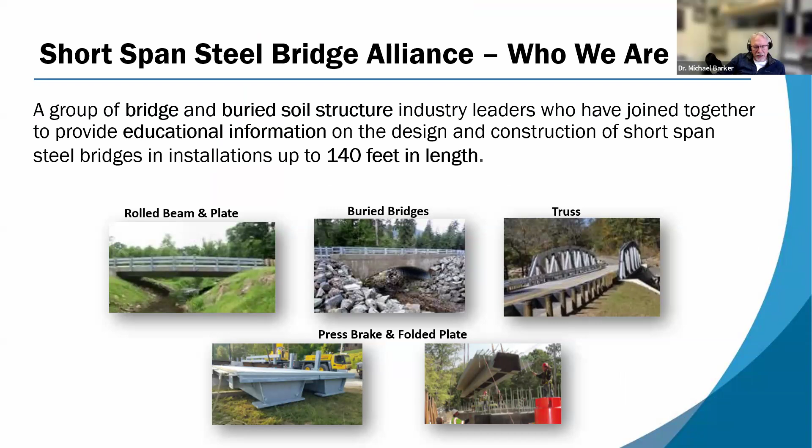We are a group of bridge and buried soil structure industry leaders who have joined together to provide educational information on the design and construction of short span steel bridges, and certainly this is one of them. We look at rolled beam and plate bridges, buried bridges or arches, truss bridges, press brake bridges, and folded plate bridges. Our members are pretty much anybody who has a stake in the design, production, and construction of short span steel bridges, ranging from academics all the way down to fasteners and painters.

What we do is education, that's what we do a lot of. This is an example of that, but we also have lots of online certificate programs and other types of webinars that you are certainly encouraged to join. You can find all that information at shortspansteelbridges.org.

We also have all sorts of technical resources. We have case studies, we have some design tools that could really help you consider short span steel bridges, whether they're rolled beam or plate girder bridges, with E-span 140 and E-beam. You can find information on these at our website, and I really encourage you to visit that website.

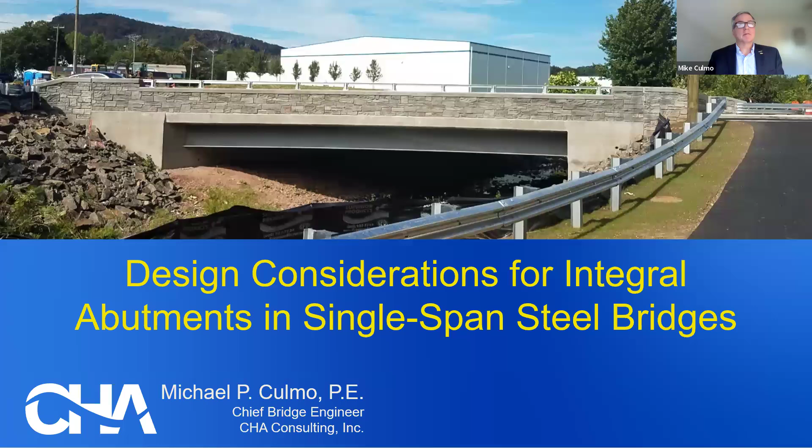It's a pleasure to be here today to talk about integral abutment bridges. The AASHTO Committee on Bridges and Structures has a major push right now for workforce development, so this is a great opportunity for us to share information among our colleagues in the bridge industry on topics of interest. And this is definitely a topic of interest. We got quite a few people signed up for this, which is awesome.

Again, today we're here to talk about design considerations for integral abutments in single-span steel bridges. My name is Michael Culmo. I'm the Chief Bridge Engineer with CHA Consulting, an East Coast consulting firm. I've been designing bridges now for 42 years, and so have a lot of experience designing integral abutment bridges. In our neck of the woods, we do an awful lot of integral bridges, and it's my pleasure to talk about what I know about integral abutment bridges and what is going on in the country with regard to their design.

Let me get my PowerPoint going. So for the presentation today, the first thing we're going to talk about is the definition of an integral abutment - what does AASHTO say about that? We're going to talk about the benefits, and there are several significant benefits for integral abutments, where they're appropriate, where they're not appropriate, some of my thoughts on that, and then get into design considerations, specifically the AASHTO LRFD bridge design specifications and state DOT provisions, primarily focusing on Minnesota DOT. Then we'll show some common details, again focusing primarily on Minnesota DOT, and go through a couple example construction projects to show photos of how these things actually get built.

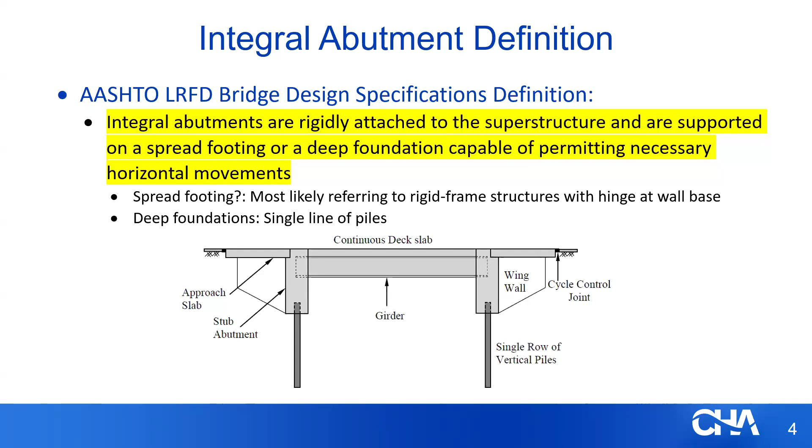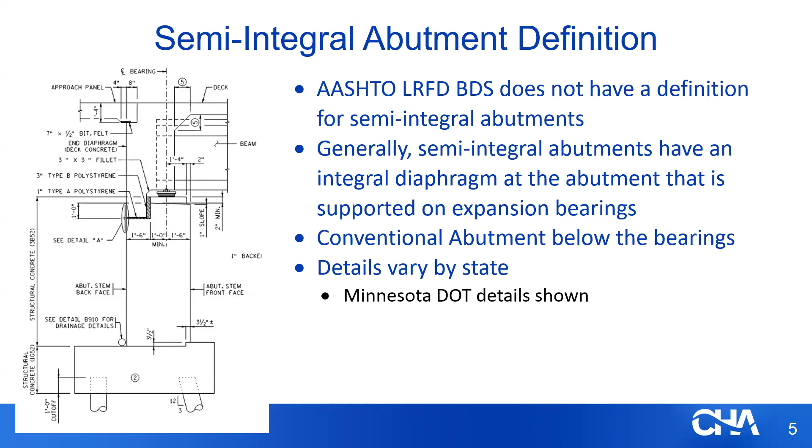Typically, semi-integral abutments have expansion bearings and fixed bearings underneath the beam to allow for thermal movement of the superstructure, but not in sync with the substructure below it. Typically, the substructure is more of a conventional abutment. We'll talk a little bit about when these are appropriate and when you would want to go to a semi-integral design in a minute.

So, European experience - about 8 years ago, I went to a conference in Italy. It was a bridge conference, and they had a session on integral abutment bridges. And I was like, oh, this is great, I'm going to go and learn about what the Europeans are doing for integral abutments.

Everyone thinks Europeans are way ahead of the U.S. and we're lagging behind. Well, the exact opposite is true. In my experience, the U.S. is very much ahead of the Europeans when it comes to integral abutments.

A lot of the engineers from Western European countries didn't like the U.S. details. They get nervous about having a single line of piles, worried the bridge will get out of position, that one side may push harder than the other, and the bridge won't be vertical. They really weren't in favor of the US-style integral abutments with a single line of piles at the abutments.

Interestingly, though, at that point, England was building US-style integral abutments. One of the presenters was from England, and he showed photos of designs in England that were very much similar to the US, and he credited the US, saying they had taken the ideas from the US market and were building US-style integral abutments in England at that time.

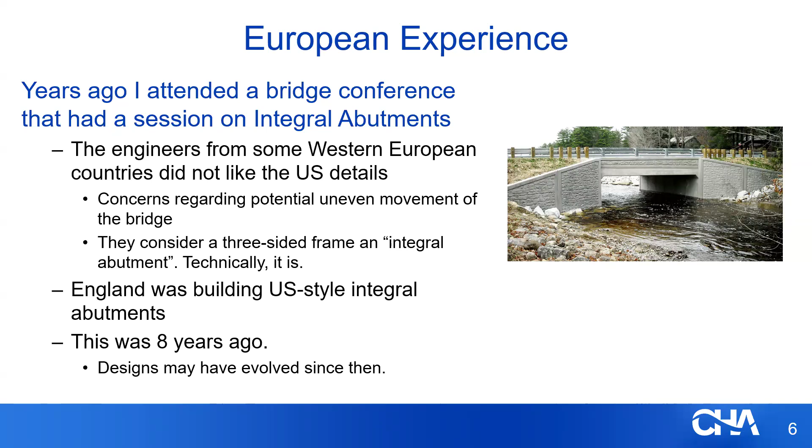Keep in mind, this was about 8 years ago. Things may have changed and evolved since then, but at that snapshot in time, at least at the conference I attended, integral abutments were not as popular in Europe as they are in the US.

Things get interesting when you get to skewed bridges. The question is, do you have the pile installed along the skew of the superstructure, or do you keep it square to the abutment? I've seen both. There's no standard approach - either way seems to work just fine. I suggest looking at whatever DOT you're working in, looking at their bridge manual for guidance, and really you can't go wrong whichever way you do it. I would typically recommend having the pile oriented on the skew with the superstructure, to correlate with the thermal expansion direction of the bridge.

Drill shafts have been used in integral abutments, typically small diameter drill shafts. The problem with large diameter drill shafts is they get very stiff and generate a lot of force when there's thermal expansion and contraction of the bridge. So we tend to see smaller drill shafts for integral abutments.

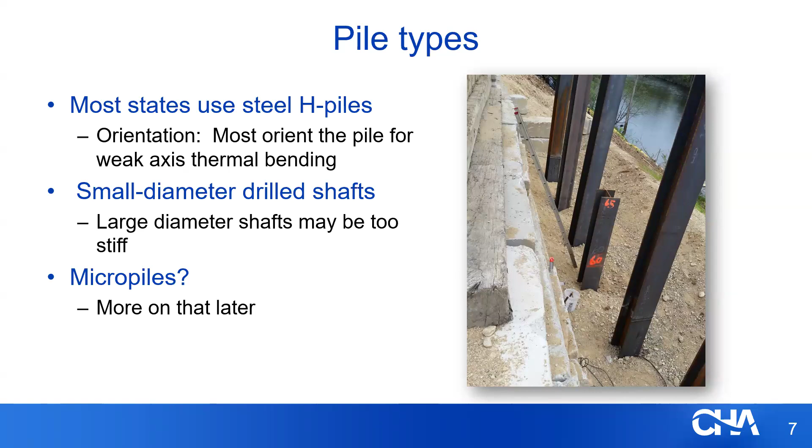Then a question comes up that I get asked quite often: micropiles. Can we use micropiles for integral abutments? I'll cover that later. There are some issues, or at least perceived issues, that are being studied, and there are several studies ongoing right now with the use of micropiles for integral abutments.

So what are the benefits? Why do we care about integral abutments? There are some significant benefits. Number one in my book is the elimination of deck expansion joints at the end of the bridge. It's definitely a significant durability improvement. I like the comment: the best joint is no joint in the bridge. As we all know, bridge joints can be the number one cause of bridge deterioration - leaking deck joints, I should say.

And I'm not taking a shot at the joint manufacturers - it's a very difficult thing to design a deck expansion joint that can last a long time and not leak. The abuse these joints take is brutal, and they tend to hold up for 10, maybe 15 years, and then start to leak. So if we can eliminate the deck joint, we're definitely going to improve the durability of the structure. We're all looking for improved durability - we're in search of that 75 to 150 year service life.

Elimination of bearings: integral abutments don't require expansion bearings. Sometimes we use temporary bearings just to get the bridge built, but once the integral abutment is made and the connection is made to the superstructure, there is no need for bearings. The thermal movement is accommodated by flexing of the piles.

So it's definitely an advantage not having bearings that you either have to install, or have to maintain over the life of the bridge. So very low maintenance costs on these structures.

Next item is lower cost. We've already eliminated bearings and we've eliminated a deck expansion joint. We're also going to use fewer piles. When compared to a typical pile-supported cantilever abutment, which might have 20, 30 piles in the abutment, we're looking at four to six piles in a typical integral abutment. So significantly fewer piles, which saves money. There's no footings, so we're not pouring a footing, and that's another step in the construction process, which is going to save quite a bit of time.

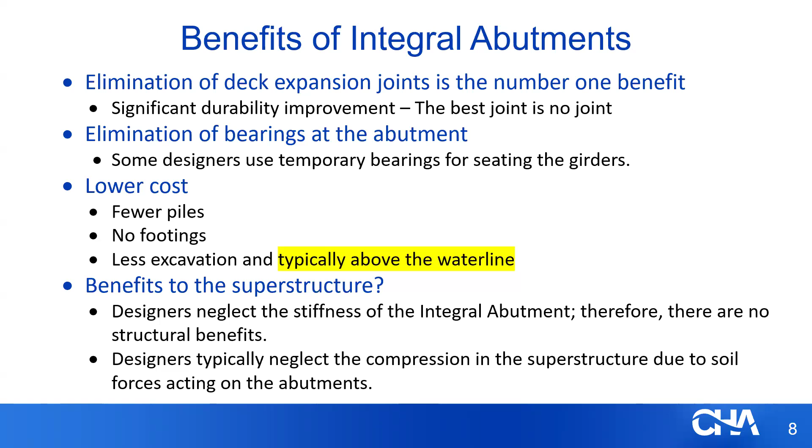So the benefits for the superstructure, are we gonna get some benefit there, some help there? The answer is not really. Designers typically neglect the stiffness of integral abutments because the stiffness of the piles is significantly lower than the stiffness of the superstructure - it's a decimal point in the equation. So typically we don't take advantage of the stiffness. I'll talk a little bit about the AASHTO provisions for certain types of bridges where you may want to consider the forces from the integral abutment, but typically we neglect the forces, especially the compression forces in the superstructure due to the soil forces acting on the abutments. The reason for that is the forces in the superstructure are peanuts compared to the bending moments we have from truck passage, for instance.

So where are they appropriate and where are they not appropriate? Single span bridges, definitely - you should be looking at integral abutments for virtually every single span bridge you're designing. You can definitely do it with continuous bridges too; it's been done in certain states. This presentation is really focusing on single span, but it can be done with multi-span bridges as well. A question that comes up a lot is what is the maximum length of bridge between integral abutments? The answer is it depends on where you're at - every state has different requirements. Some states have requirements around 150 feet max. You'll see later in this presentation, Minnesota DOT goes to 300 feet, and Tennessee DOT goes even longer. So I suggest you look at the bridge manuals in these states to get an idea of how long you can go with the design of an integral abutment bridge.

So where are they not appropriate? We have found with shallow bedrock, you have issues with the piles. If bedrock is only down, say, 20 feet below the road, you really cannot achieve pile fixity in such a short distance. Some states like Massachusetts will core the piles into bedrock - they call it a rock socket, and that's one approach. But typically with shallow bedrock, you want to shy away from integral abutments because there can be some issues. In that case, you might look at a semi-integral abutment - that might be an appropriate solution.

The next one is bridges with significant scour. It's a debatable topic - I've asked several DOTs this question: are you okay with the soil behind the abutment being scoured away in a major flood event? I've seen pictures of bridges after floods where the entire backfill was gone, where the river essentially scoured out behind the abutment and the bridge was fine, and they just backfilled and reopened the bridge. But you're losing the road. So it really is debatable whether a DOT is going to require scour design - again, I'd look into the bridge manuals in the states. I know Connecticut DOT has requirements for depth of stem for integral abutments. And for very long bridges, the soil pressures brought on by thermal expansion of the bridge can get significant - you're putting significant flexure in the piles. So a lot of states limit the length of bridge for these reasons.

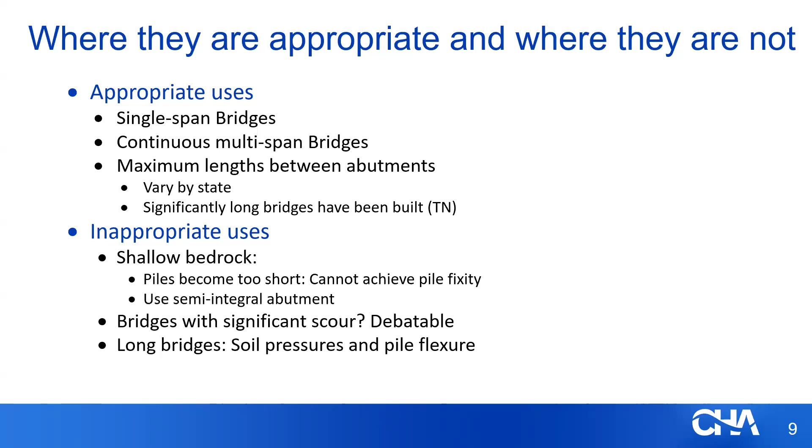So now we'll get into the design requirements for integral abutments. As far as I'm concerned, there is no national design process for integral abutments - we use engineering judgment in most cases. I'm going to go through the AASHTO bridge design specification criteria for integral abutments, and there's not much - there's a few things in there. But there are some states that have significant design requirements, such as Massachusetts and Minnesota. I'm sure there's more out there - Tennessee, I know, has a lot of requirements as well. Again, refer to the bridge design manuals in these states if you're designing an integral abutment there.

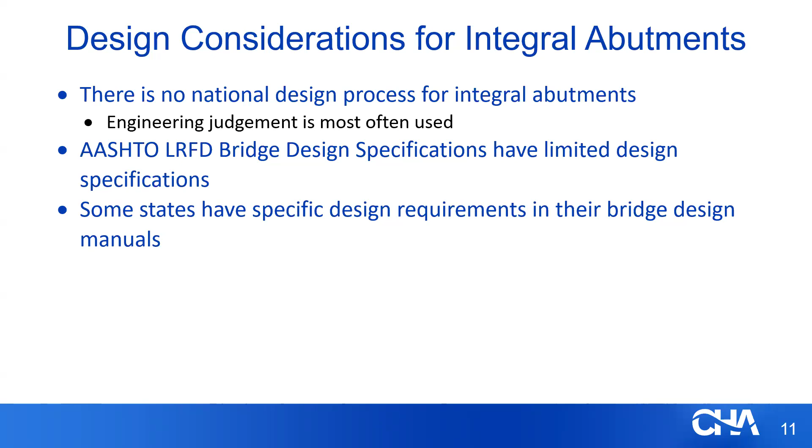So let's dive into the AASHTO LRFD. I did a search of integral abutment in the actual LRFD bridge design specification, and about 10 hits came up, and I'll go through each one of those now.

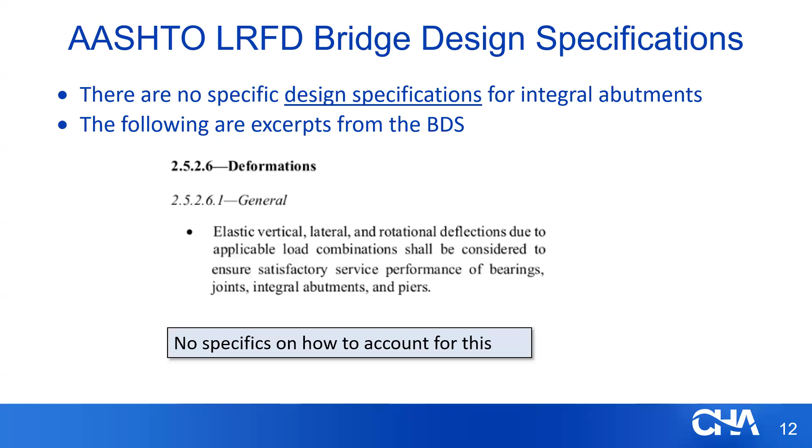Article 2.5.2.6 on deformations says that elastic, vertical, lateral, and rotational deflections due to applicable load combinations shall be considered to ensure satisfactory service performance of bearings, joints, integral abutments, and piers. It basically says we have to consider the movements of the bridge in the design of the structure.

Article 3.11.5 is on the loading section. The earth pressure loading has a comment there. It says that for integral abutment walls, significant arching of the backfill against the wall does not occur, probably due to the movement of the structure, and the resulting lateral load due to earth pressure acts at a height of h/3 above the base of the wall. You could read what goes on beyond that, but there's some guidance there on how to handle earth pressure on integral abutment bridges using this provision.

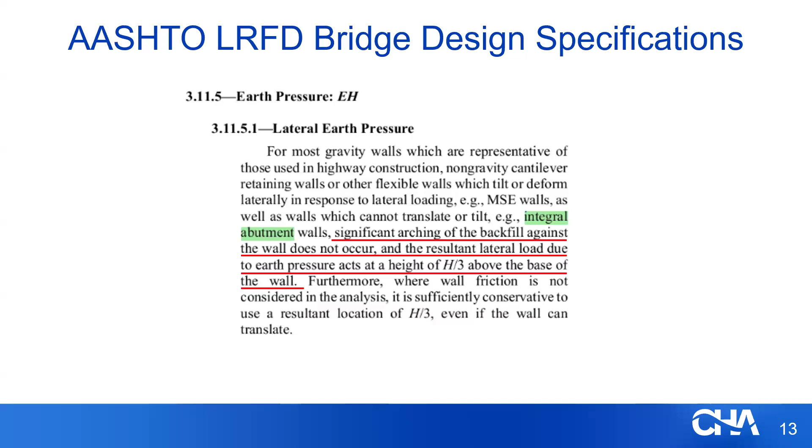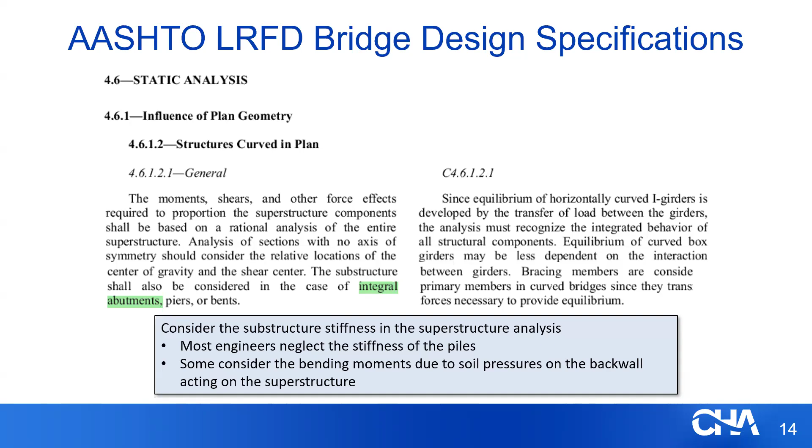As I said before, most engineers neglect the stiffness of the piles. Some consider the bending moments caused by the soil pressures acting on the back wall and the stem, causing negative bending forces in the superstructure when you have thermal expansion. I'll show that in a minute. And there are provisions in AASHTO that hint that maybe that's something you want to consider as well, which I'll get to in a minute.

For curved steel bridges, Article 4.6.3.3.3, this paragraph is in the commentary. The stiffness of supports, including lateral restraints, such as integral abutments or integral piers, should be recognized in the analysis. Keyword is should, doesn't say shall. Since bearing restraint is offset from the neutral axis of the girders, large lateral forces at the bearings often occur and may create significant bending in the girders, which may lead to lower girder moments than would be computed if restraints were not present. The engineer should ascertain that any such benefit recognized in the design will be present throughout the useful life of the bridge.

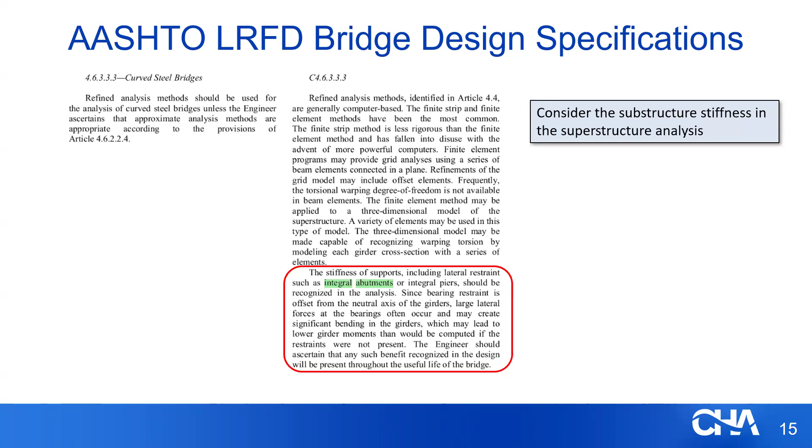This has to do with the soil forces pushing on the integral abutment, causing negative bending at the abutment. That negative bending can reduce your positive bending along the span, and that's what this commentary is hinting at. But the key word here is a lot of shoulds, not shalls. You may want to consider it, but be careful. Most engineers would not take those forces and say they're going to reduce live load bending moments because of soil pressure pushing on the back of the abutment. The reason is if the bridge contracts, you lose that soil pressure and it's not present all the time. So it's something you really can't count on.

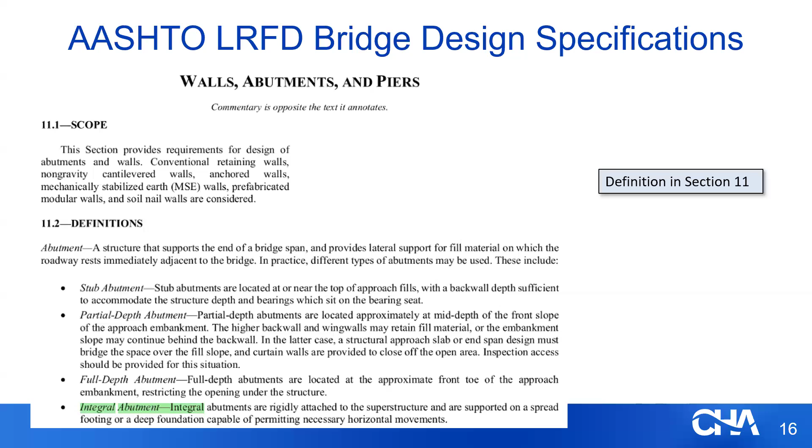Now we get to section 11 in the AASHTO LRFD, which covers abutments, walls, and piers. Here's where we find the definition of an integral abutment, which I shared earlier in one of the earlier slides.

We actually have an article on integral abutment bridges, Article 11.6.1.3. It just says that the abutment shall be designed to resist and/or absorb creep, shrinkage, and thermal deformations of the superstructure. So the thermal is probably the more important one of all three.

Then I circled this one area. To avoid water intrusion behind the abutment, the approach slab should be connected directly to the abutment, not to the wing walls, and appropriate provision should be made to provide drainage for any entrapped water. That's a good idea for any abutment, but specifically for integral abutments, AASHTO tells us to use approach slabs and put some drainage to drain the soil behind the abutment. One thing it doesn't mention about the approach slabs is that it also reduces the surcharge loading on the abutment stem by pushing that live load further away from the back of the abutment.

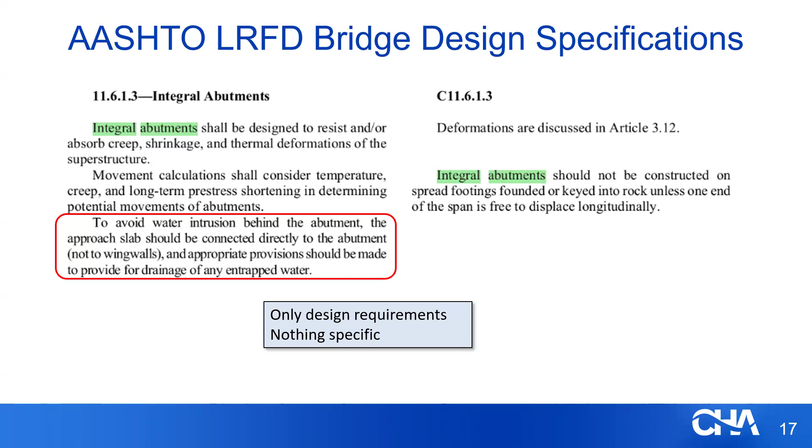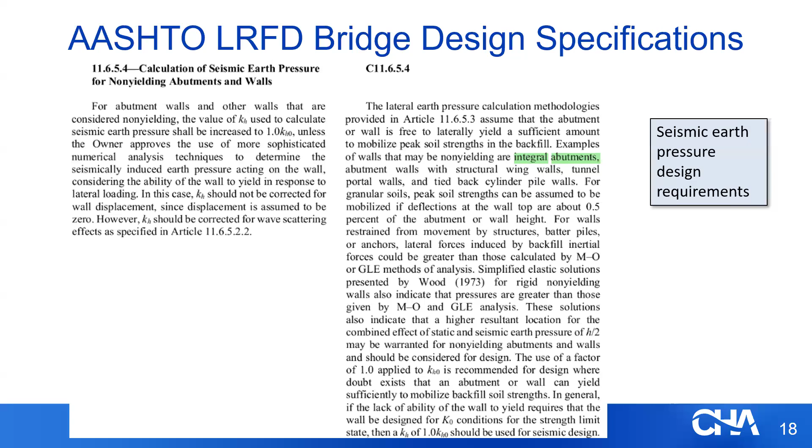So that's it for the AASHTO LRFD code. That's what we have, and you'll notice there's not a lot of equations, not a lot of specific requirements. And that's why I said before, engineering judgment primarily is what's used.

So now let's talk about how we typically design these bridges. As I mentioned before, we typically treat these bridges as simple spans, and we neglect the stiffness of the piles, and in most cases neglect the soil forces acting on the abutments when we design the beams. So when you're designing your girders and beams, you can use standard design software, treat it as a simple span, and design it. It's conservative because the soil forces tend to reduce your positive moments, but we don't count on those soil forces to reduce positive moments.

So the good news is if you're designing a simple span bridge, you want to use the Short Span Steel Bridge Alliance eSPAN140, you can go ahead and use it for an integral abutment bridge. Any software you use for design would work with integral abutments, which is a nice thing—it's not a special design requirement. And again, we neglect the stiffness of the piles because if you calculate the moment of inertia of that pile group compared to the moment of inertia of the superstructure, it's a decimal point on the end of the equation. So it's not even worth considering.

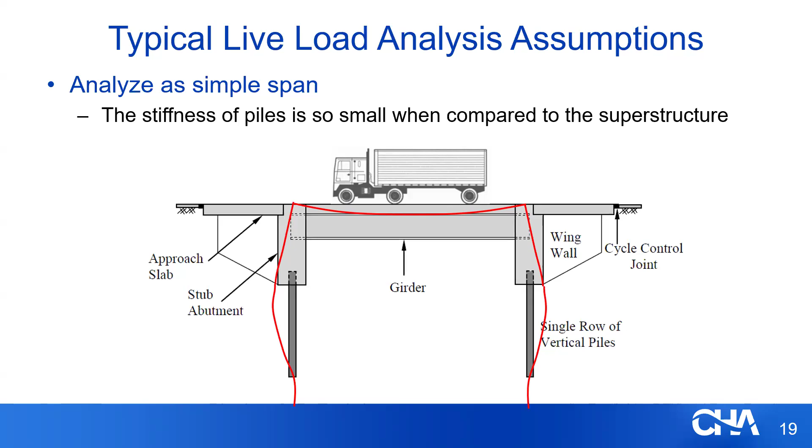We typically can check that negative bending. We would just design the bending moment at the abutment like you would for a continuous steel girder in negative bending at a pier. You would check to make sure there's adequate deck reinforcement to control cracking.

But here's the key thing, and this is a steel bridge webinar—this issue is more of an issue with pre-stressed concrete girders, because if you design any pre-stressed concrete girders, you know there's a lot of tension or very high stresses at the top of the beam at the abutments. Adding a big negative moment on the end of a beam can be problematic with pre-stressed concrete, so you have to be very careful with it. But the good news is steel structures can easily handle these negative moments—it's not a problem at all. It's something I suggest you check, similar to a negative moment region of a continuous girder.

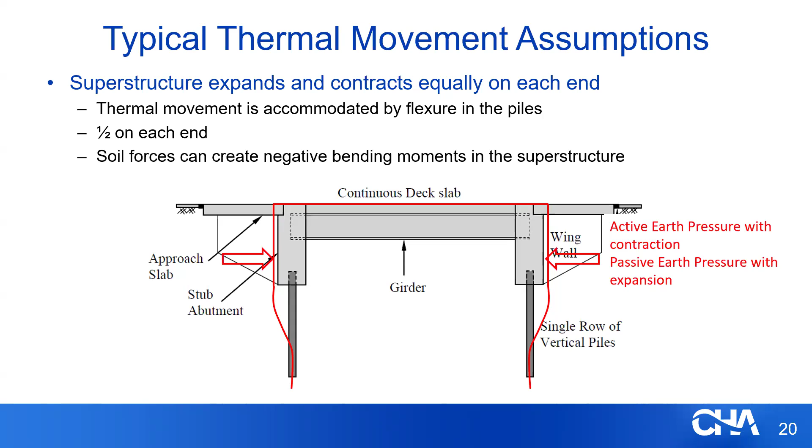Important thing to understand, and I've seen this mistake made a few times: consider the sequence of construction and include notes in the plans to specify it. When you go to pour the deck and the integral diaphragm, there are really three areas poured—the integral diaphragms at each end of the bridge and the deck over the top. You want to pour the deck first, so the red region would be poured first. This allows the girder to deflect under dead load, and your beam end rotations occur before you make the bridge integral.

Then you go and pour the abutment diaphragms after the deck. You can pour the second abutment diaphragm with the deck—so you start on the left side of the bridge, work your way across, and at the end, when you hit the end of the red section, you can pour the integral diaphragm as a continuous pour with the deck. But then you have to come back and pour the integral diaphragm at the other end of the bridge, because you want that rotation to take place before you make that connection.

You could consider retarding the concrete, although I would not recommend it. I've seen cases where with beam end rotations, you can get plastic cracking in that diaphragm before the concrete even sets. So I would suggest you include notes in the plans noting this type of sequence of deck pours.

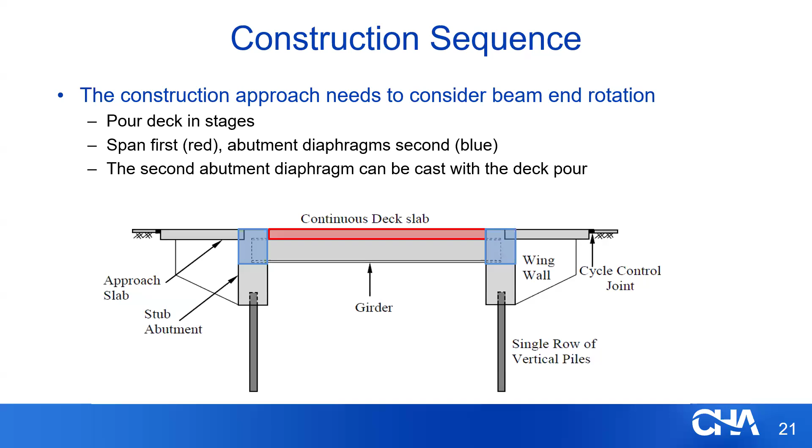So now we're going to get into state DOT provisions. What do the DOTs say? As I mentioned before, AASHTO doesn't have a lot of provisions, and some states have significant provisions, which is helpful. Unfortunately, every state seems to treat these a little bit differently. So us as bridge engineers who work in multiple states have to make sure we read the provisions.

So several states do have design provisions in the bridge manuals. Mass DOT I'm familiar with, they've had provisions for many years. They have standard rebar detailing, standard pile designs. Things are pretty well standardized in Massachusetts. They've been building integral abutment bridges from almost my entire career, like other states like Tennessee as well.

But today I want to focus on Minnesota DOT. It's a Minnesota webinar, and Minnesota DOT has a very good bridge manual with some very good practical approaches for designing integral abutment bridges in Minnesota.

So let's dive in. In the abutment type selection portion of the Minnesota Bridge Design Manual, it covers integral abutment bridges, and it's got some very practical approaches for selecting when to use them. For instance, bridge length can go up to 300 feet if you've got low skew between abutments. And the expansion length at the abutments is 150 feet, half on each end of the bridge.

If you start getting into skewed bridges between 20 and 45 degrees, the bridge length is limited to 100 feet because of the skew effects. And one of the issues with skew, there have been concerns - I call it the snowplow effect.

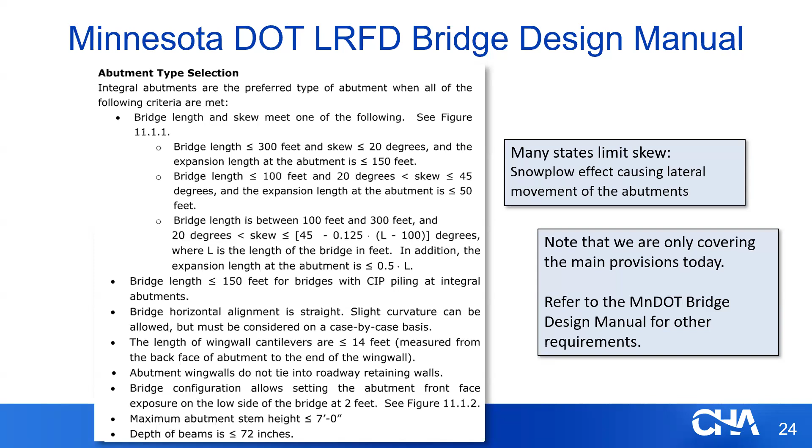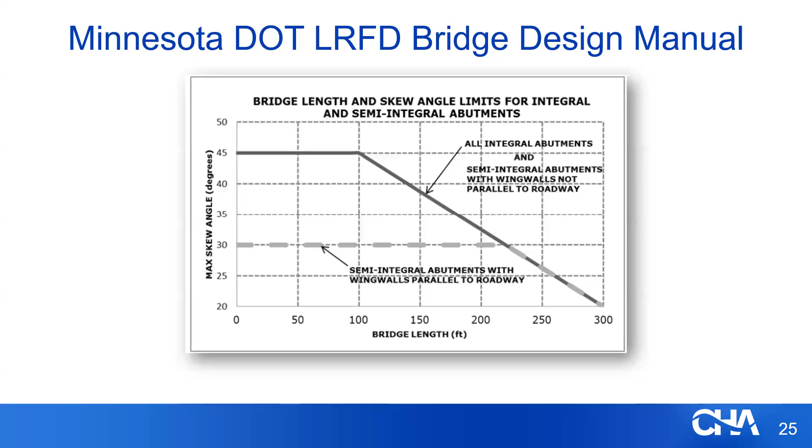This provision talks about semi-integral abutments in Minnesota, and where they are applicable. When the wing wall length requirements for structure depth, superstructure depth, and wing walls cannot be met, you should go to semi-integral. And then again, bridge length - there are requirements there as well.

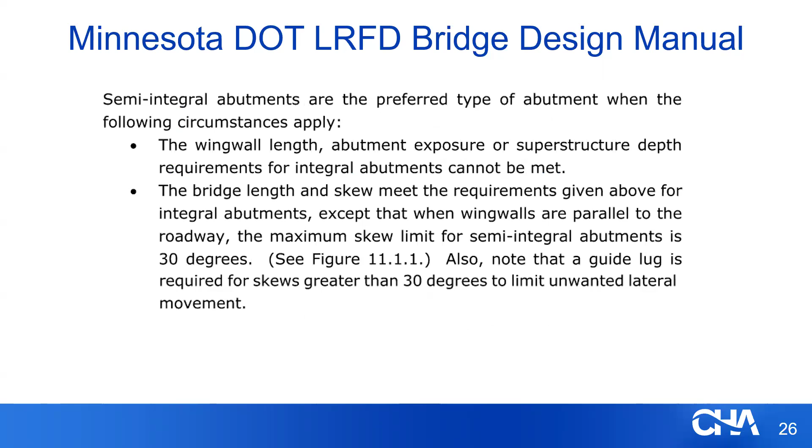Minnesota has details, similar to a lot of states, showing details as far as depth of embedment of the integral abutment into the abutment slopes. In this case, the recommended minimum thickness is 3 feet below the stem, and they're proposing to put riprap for scour protection in front of that.

And then there's notes about skewed bridges as well. They make a note that the typical Minnesota requirement of a 4-foot 6-inch embedment below grade is not required for integral abutments, like you would with a cantilever abutment. And then it specifically states that the H-piles should be oriented in the weak axis bending with regard to longitudinal bridge movements.

Minimum pile penetration into the stem varies state by state. 2 feet 6 inches is about average - I've seen up to 5 feet, and I've seen less than 2 feet. My experience, 2 feet is plenty of embedment. 2 feet 6 inches is very good, and you can develop the full bending moment capacity of the pile in that depth. Even 2 feet, you can do that in my experience.

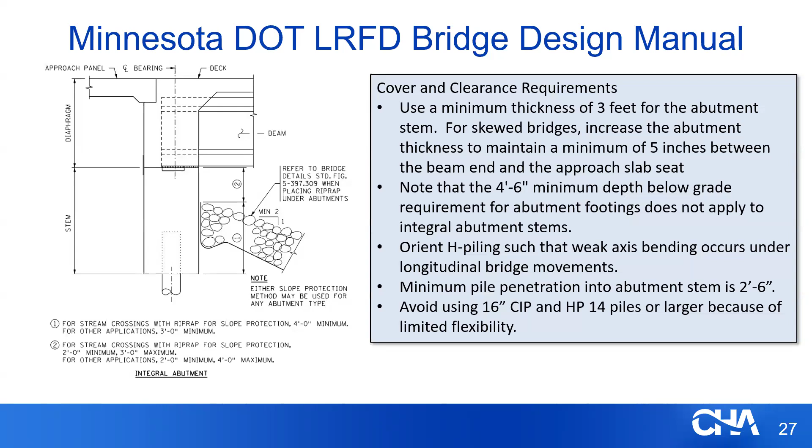Then there's a note about avoiding the use of 16-inch cast-in-place piles or 14-inch HP piles. Again, trying to keep it relatively flexible to accommodate the thermal expansion and contraction.

The Minnesota Bridge Manual has details for wing walls, saying the maximum length of the cantilever wing wall is 14 feet. I've seen cases where engineers want to put piles underneath the wing walls, but you should not do that, because that wing wall is rotating with the integral abutment under live load. You don't want any piles underneath the wing walls, since it's rotating with that abutment stem. It's a cantilever, like an elephant ear sticking out the back. Minnesota limits the length to 14 feet, which is about average. Most states vary between 10 and 15, maybe even 20 feet, but 14 is a pretty good average.

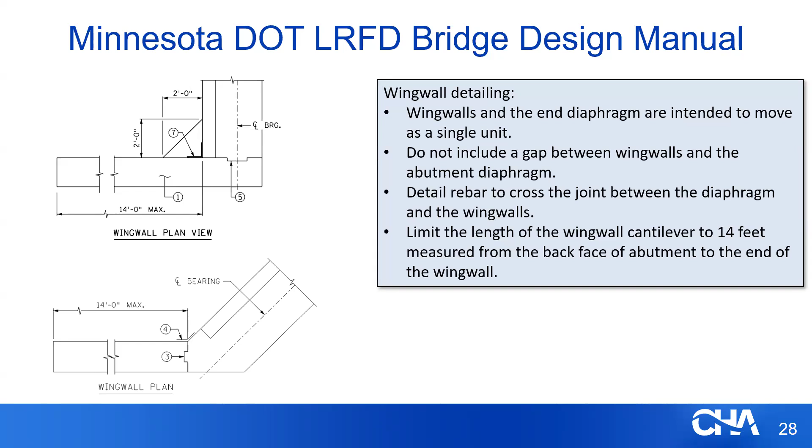Now we get into details. These are the typical details from Minnesota DOT. I like these details, they're similar to most states that do this, with some minor changes you'll see later.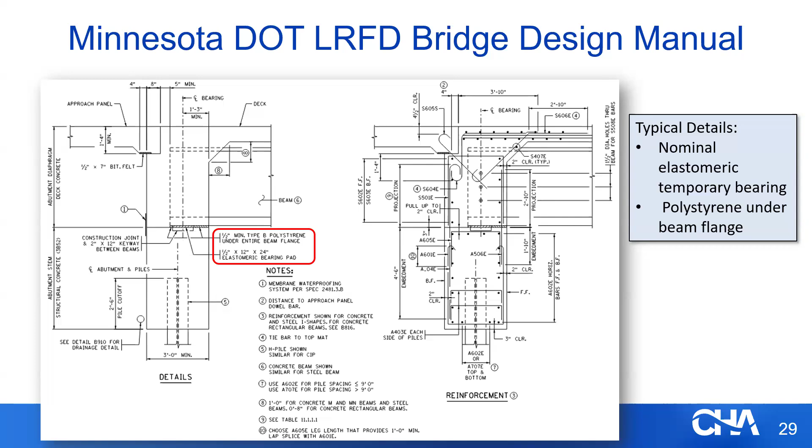Moving on, additional criteria in the Minnesota Bridge Manual. I like this criteria, it's an interesting one that's debatable in the industry, saying design the piling for axial loads only. We know there's going to be bending in the piles, especially with live load on the bridge and also thermal expansion and contraction. But this provision came out of, I believe, Tennessee, and it's a provision that I believe in.

You might say, but there is bending in the piles - I'll cover that in the next slide, my theory of why you can ignore bending in the piles and just design them for pure axial load. Also, this section of the bridge manual talks about live load distribution, where you essentially treat the abutment stem as a pile cap and distribute the live load along it using simple logic, nothing very complicated.

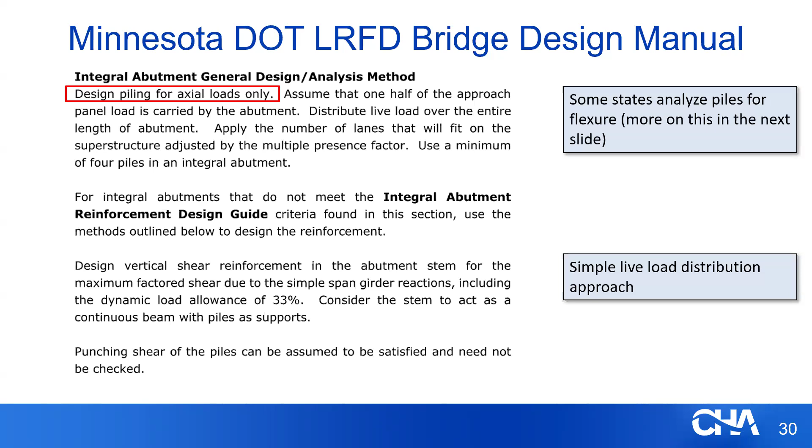So let's talk about this flexure issue. Minnesota only specifies axial load, so we ignore bending in the piles. States like Massachusetts do not - we design piles for flexure in Massachusetts. I believe in Tennessee they also ignore bending in the piles, but they limit the maximum length of integral abutment bridges, like Minnesota. They've done studies based on typical loads in piles and typical thermal bending moments, and determined that as long as you stay within the bridge manual limits, you can ignore bending.

So why ignore flexure? These are my thoughts - there's nothing in AASHTO, nothing published that I'm aware of explaining why we do this. But in my eyes, we can consider flexural stresses to be similar to residual stresses in steel. The reality is structural steel - I got this diagram off the internet - all rolled sections have significant residual stresses, 10 to 15 KSI is pretty standard, just due to the rolling process and cooling of the steel in the mill. So we ignore residual stresses in design.

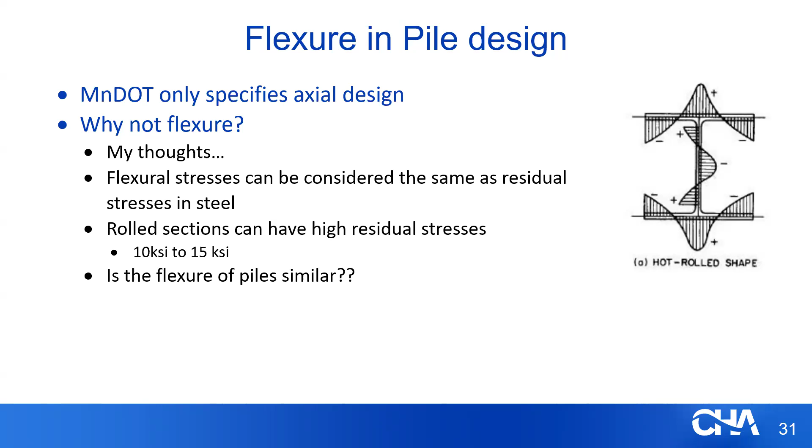We just go through and design it. So why do we ignore these high 10 to 15 KSI residual stresses? This might be the answer for why we can ignore bending stresses in piles of integral abutment bridges, because it's really similar to a residual stress. Let's take a look at that. When I was in grad school, my professor taught us about residual stresses in the design of columns, and why we ignore residual stresses in columns.

The idea is that as you apply compression, your compression in the column is additive to the residual compression stress in the beam, so that area of the beam will yield before the other areas. But as you continue to add load, eventually you start yielding the compression area, but you've got ample capacity on the tension side where you haven't come close to yield. The result is the ultimate compressive load works out to be A times Fy, and that's if you have a compact section.

So we literally ignore residual stresses, and that may explain why we as engineers might feel comfortable ignoring the bending stresses in integral abutment piles.

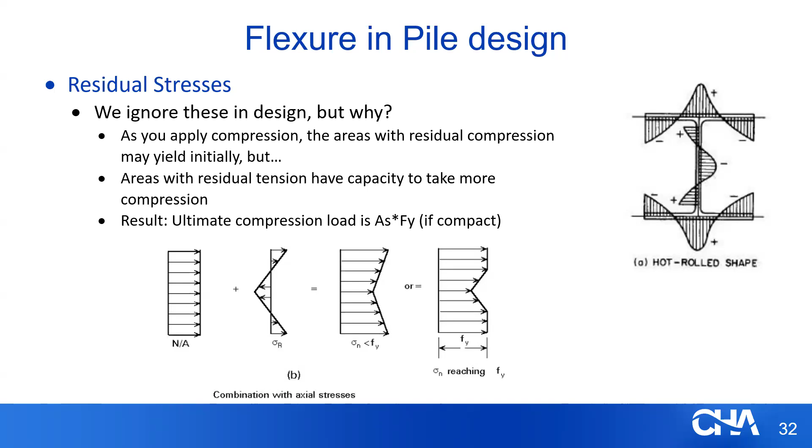Minnesota DOT has some geotechnical requirements, fairly straightforward. The key thing is they design for full passive earth pressure. Massachusetts DOT does a calculation based on the amount of thermal movement to see if you get to full passive or partial passive. So there are different provisions out there - again, refer to your bridge manual. But I reiterate, this may be an issue with prestressed concrete beams having a significant negative bending moment at the ends, but steel can definitely handle it, and it's really not a big issue.

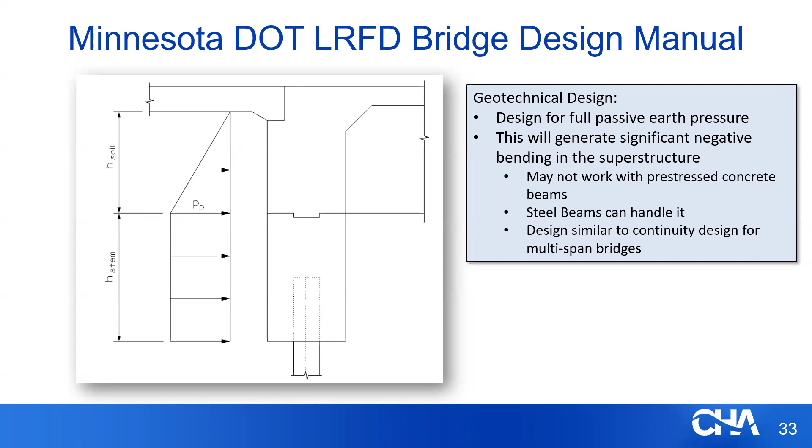As far as semi-integral abutments go, Minnesota DOT has some great details - I like these a lot. I've seen various details around the country. The key thing is the bearings are designed to accommodate thermal movement, but the longitudinal forces, such as braking forces, are resisted by the back wall. So it really helps out with dealing with those longitudinal forces.

And I added here, this detail works really well with accelerated bridge construction. I'm going to show you some details used in Utah, and we've used them in other states as well, where you could design a semi-integral bridge with ABC. So you get the benefits of integral bridges, and you also get the benefits of accelerated construction.

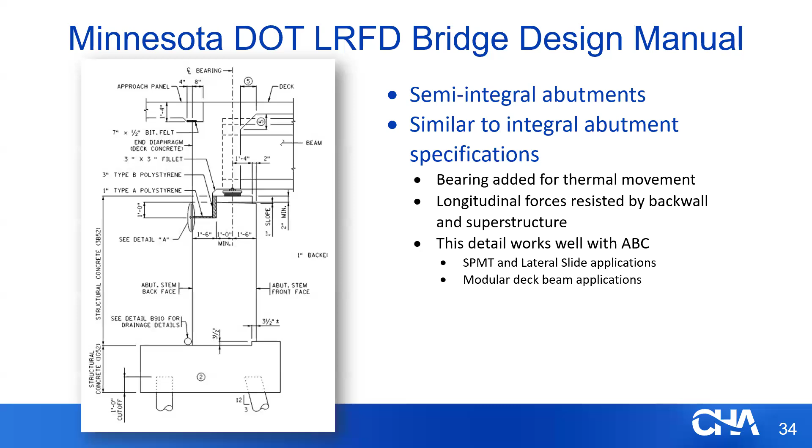Here's what that might look like. This is a bridge in Rhode Island that our firm designed a few years ago - a single span steel bridge, about 80 feet. The detail on the right is a SketchUp model of the semi-integral abutment diaphragm. You'll notice that tooth on the back, which looks a lot like the Minnesota tooth, and those other knobs sticking down are used for sliding the bridge. It's a great detail that works really well.

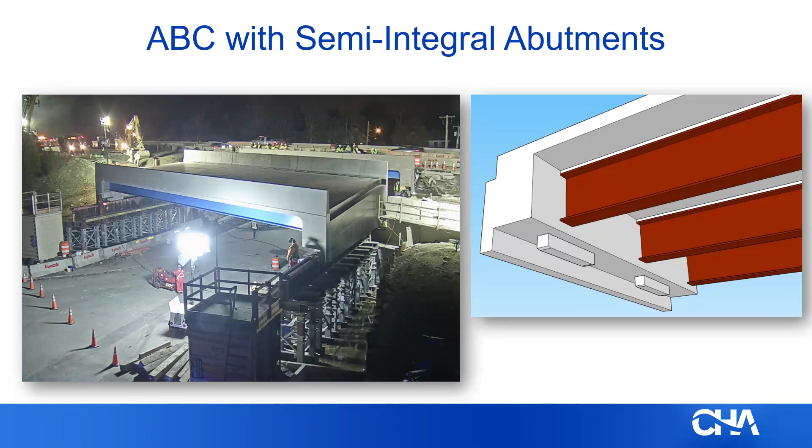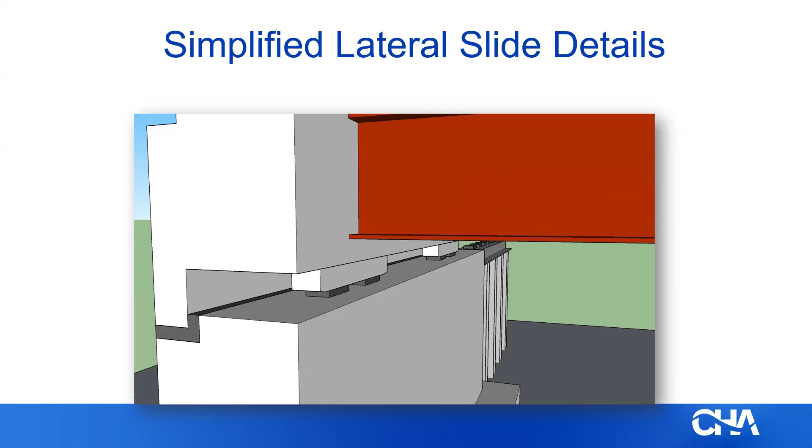Here's how it goes: you build the bridge on temporary supports nearby. Once the abutment is finished, you start sliding the bridge over on temporary slide bearings or a slide track. Once it's in place, you jack the bridge up, put the permanent bearings underneath those shoes, and then place closed cell elastomer to seal off that joint in the back to prevent groundwater from coming onto the bridge seat - very simple detail. This can be used for lateral slides, SPMT moves, and modular deck beams as well. All ABC methods that are very much applicable to steel bridges.

So now let's go through some sample projects - let's take a look at some bridges that have actually been built. I've got two I want to share, primarily because I have a bunch of photos. I have one bridge with just one photo, but then I have a really nice steel bridge with a bunch of photos during construction.

I mentioned before about micropiles, and there's been a lot of discussion on why can't we use micropiles for integral abutments. Massachusetts DOT is studying this right now. This is the Champeau Road Bridge in Sturbridge, Massachusetts - about a 65, 70-foot long bridge. Mass DOT had a desire to use micropiles, but we took a conservative approach.

So for the design of this particular bridge, we specified a minimum coupler depth - the coupler had to be a certain number of feet below grade, where the bending moments in the pile were not very significant. So it is a concern, but Massachusetts is looking at this.

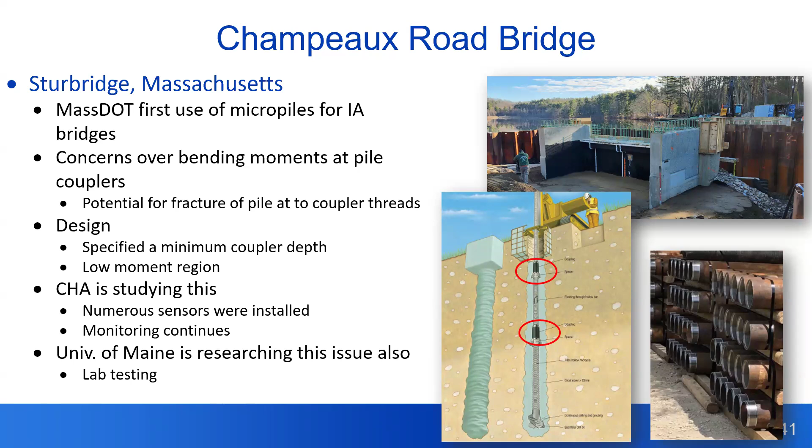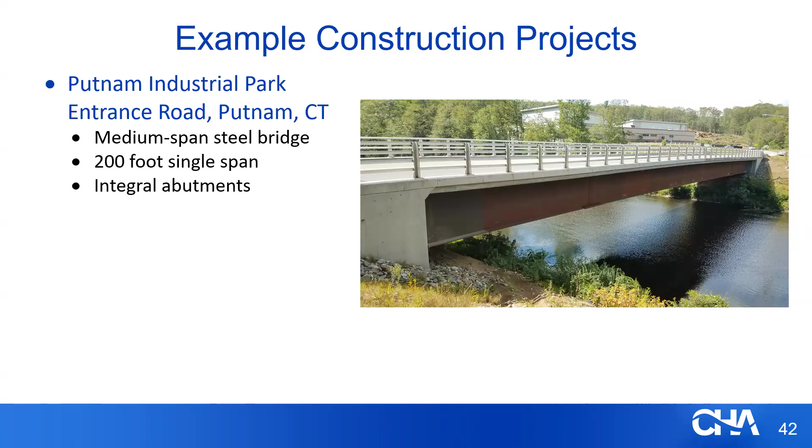Now we'll get to an example project showing the construction of an integral abutment bridge. This is a bridge in Putnam, Connecticut, slightly longer than your short span steel bridge. This is a short span steel bridge alliance webinar, but all the details and photos shown are applicable to any steel bridge. I picked this one because I have a lot of good pictures of it under construction. This particular bridge had a 200-foot single span, which is pretty long, but it was very advantageous to span the entire river because of environmental regulations and scour concerns. So this is a 200-foot single span with full integral abutments.

This is a layout of the bridge. It's a brand new road, which is nice—we don't have stage construction to deal with here. It was land where an industrial park was being built, a former landfill being converted into a technology park, and we came up with a new entrance road. The existing access to the site was actually a temporary Acrow bridge, and the idea was to have a permanent bridge to access this park. You'll see we squared everything up nicely, a 200-foot bridge with zero skew.

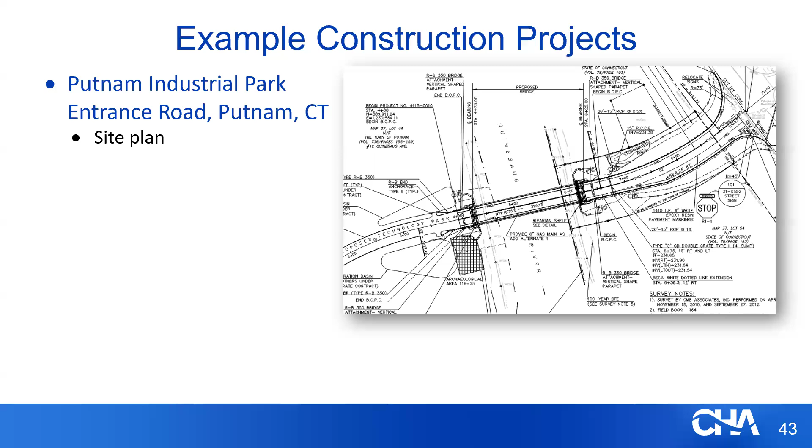Here's the cross section of the bridge, which is your typical steel bridge. We have 4 girders with a composite concrete deck. In Connecticut, we use a lot of asphalt overlays with high quality waterproofing membranes, and the lower detail shows the elevation of the bridge.

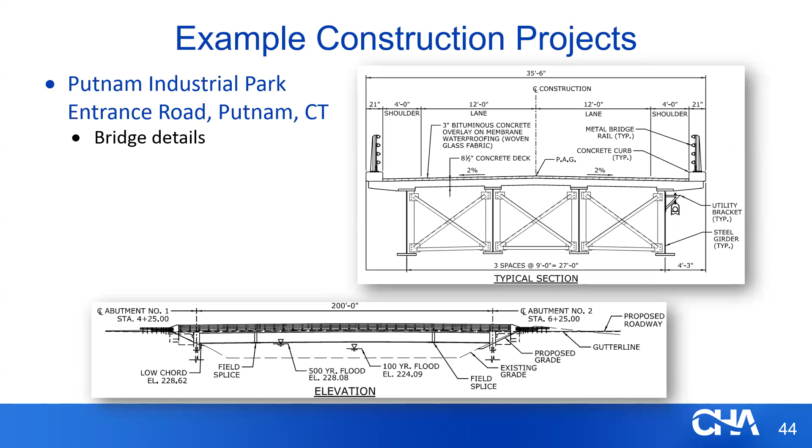As far as the pile layout, we went with the piles in the weak direction. From the previous slide you saw we had 4 girders. A lot of times engineers will put the same number of piles as girders—if you have 4 girders, you go with 4 piles, placing the pile directly underneath the beam, which is a good design. Now, I have seen details where engineers had the pile supporting the erected beam and then cast concrete around the whole thing. I don't recommend that—it can get problematic for getting the elevations right and making that temporary connection. Most people will pour the integral abutment stem and then set the girders on top, like the Minnesota details.

In this particular case we went with 6 piles, and the reason was the span length at 200 feet. We were using the Massachusetts DOT design requirements, so we were actually calculating bending stresses in the piles. To control those stresses we went to a slightly larger pile, 14 by 102, oriented in the weak direction, but used 6 piles as opposed to 4.

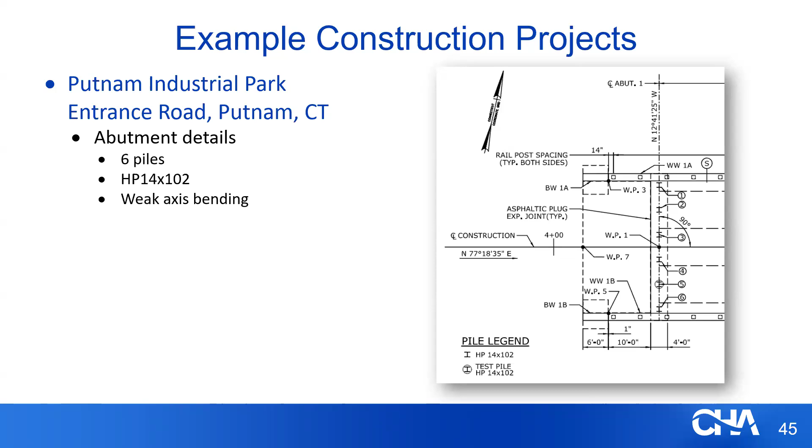So this is a detailed abutment—should look very similar to the Minnesota details. I have a couple arrows pointing to a few things. One, the temporary erection pad, 3/8 by 24 by 10, very similar to the Minnesota details. Connecticut and Massachusetts don't require the polystyrene underneath the bottom flange—we've done it that way for years and it works fine. The embedment of the stem is 36 inches.

That's I believe a Massachusetts requirement, and it seems to work well—similar to the Minnesota detail, or the same, I think. The embedment of the pile is 2 feet; Minnesota goes 2 feet 6 inches. This particular one was 2 feet, and I'm okay with either—2 feet or 2'6". It's not a big issue to have that be 2, 3, or even 4 feet.

As far as the reinforcing in the stem, you'll notice there's quite a bit more reinforcing here compared to the Minnesota details—Massachusetts adds quite a few shear bars into these abutments, which you'll see in the cross section. I highlighted the vertical bars, number 8's at 8 inches, because there are significant bending moments acting on the stem, with the primary reinforcing picking that up as vertical bars, so they can get quite large—number 8's at 8 between the beams, and number 8's at 12 elsewhere.

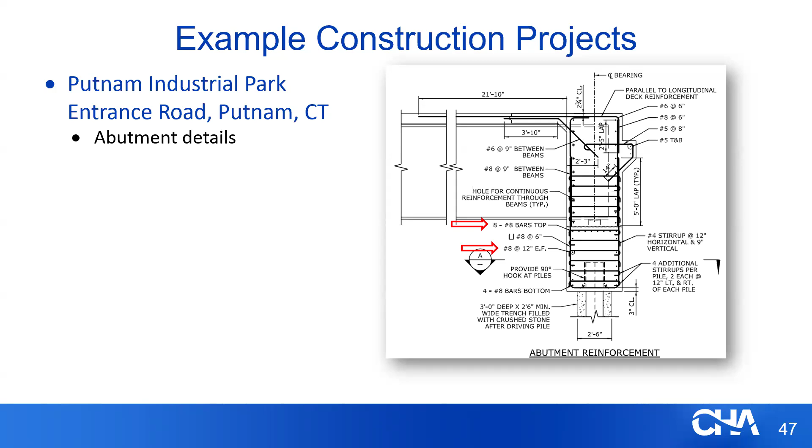Interesting detail we use for the temporary bearing, similar to Minnesota details, a fairly thin elastomeric pad. We call it an erection pad. You'll notice the bearing stiffener is moved back a little, because when the beam is erected with camber, it's primarily sitting on that back corner. We moved the bearing stiffener back slightly because once the concrete is poured, the bearing stiffener doesn't do anything anymore. The whole thing is encased in concrete, and it's just a temporary bearing stiffener, offset slightly from the center line of bearing.

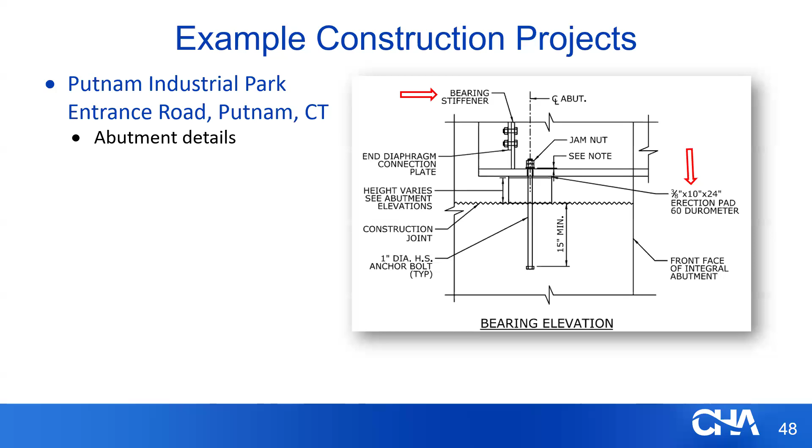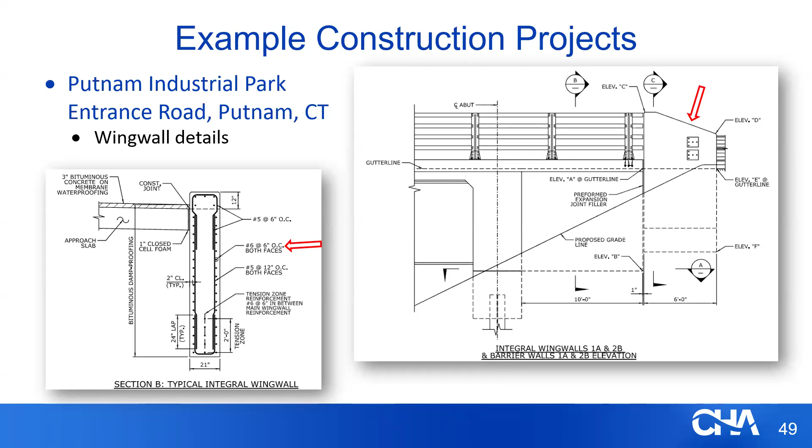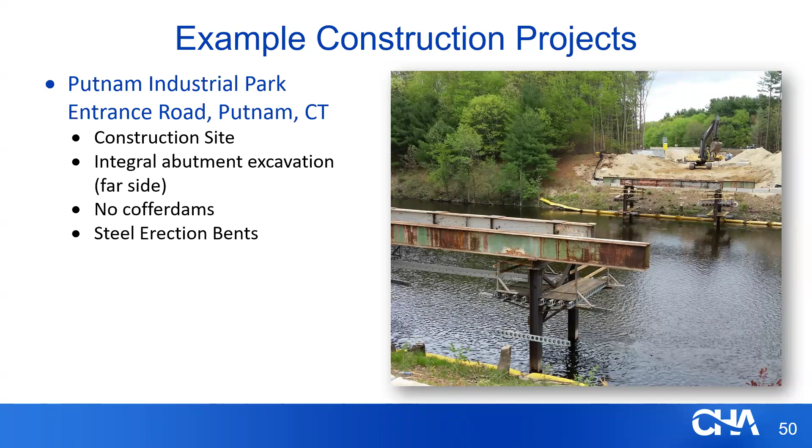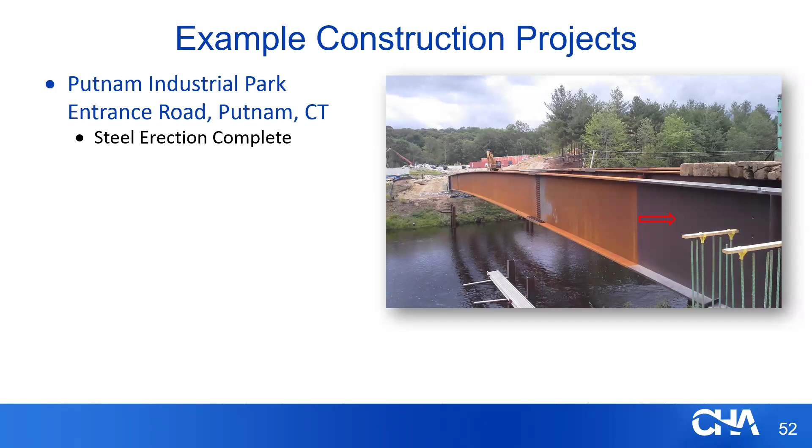At the completion of steel erection, here's what it looked like. I'll just point one thing out: at the ends of the beam, this is a weathering steel bridge. We recommend, and the steel industry recommends, considering painting the ends of the beam because you can get condensation at the interface between the steel girder and the integral abutment bent. Although we did a study for Connecticut DOT and didn't find that to be a problem, to be conservative you can paint the ends of the beam if you want, although I don't think it's that important since it doesn't seem to be an issue.

Showing the construction of the end diaphragm, you see the beams are all erected, the temporary cross frames are in at the end, and the rebar coming out of the stem.

Notice there are holes in the web of the girder where reinforcing bars are passed through the girders to complete the reinforcing in the integral diaphragm.

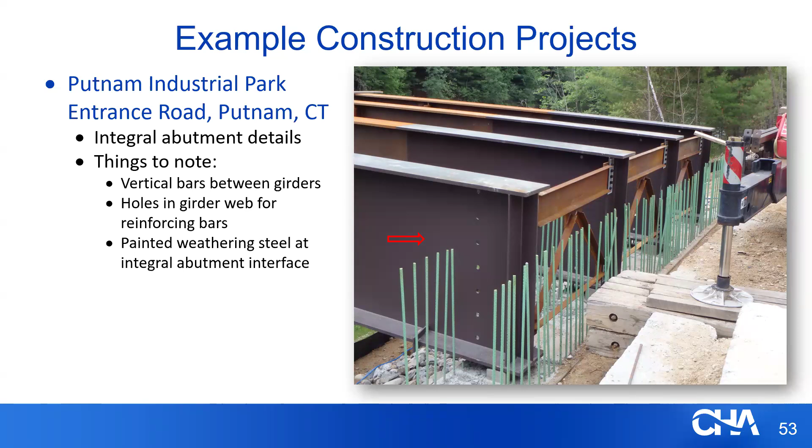Showing the back end of the beams, showing the bars coming out of the abutment. You'll notice those two bars that are bent - that was so the contractor could tighten the bolts on the cross frames. Those bars were straightened out after the cross frames were installed.

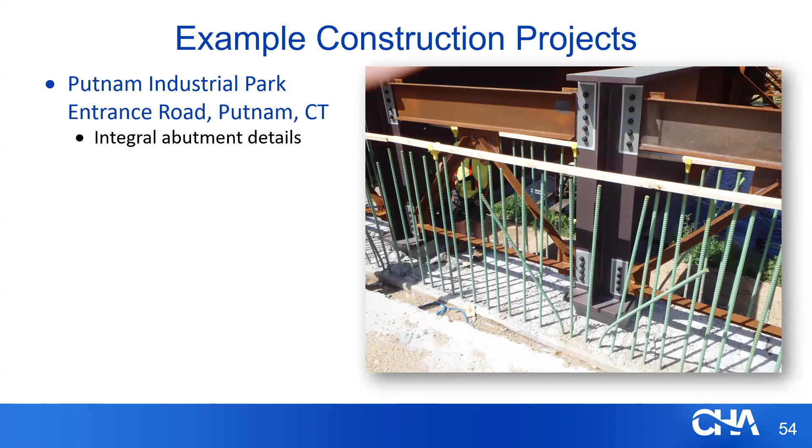Good shot here showing the temporary bearing that the beam is sitting on.

And that's it. So in conclusion, I truly believe that integral abutments should be your first choice for abutment substructures on steel bridges. You eliminate deck expansion joints, you eliminate bearings, lower cost, easier construction in the dry, easier permitting. It has all the benefits you would want in a bridge, and they're ideal for steel bridges.

The negative moments that can be generated at the integral abutments due to passive earth pressure can be significant. Steel bridges can handle it; concrete bridges, you've got to be careful - you can easily crack a concrete girder if you're not careful. Various pile types can be used, but most people use steel H piles oriented in the weak direction, which is the most popular choice.

The AASHTO LRFD bridge specs have limited design requirements, just a handful, but luckily some owners have significant design requirements. If you're in a state without any requirements, I like the Minnesota DOT Bridge Manual - I think they have a very practical approach to integral abutment design. So with that, that concludes my presentation. I'll be happy to take any questions you might have now.

Any questions? This is Michael Barker from the Alliance and University of Wyoming. Before we get to common questions, are there any questions we can just go live with?